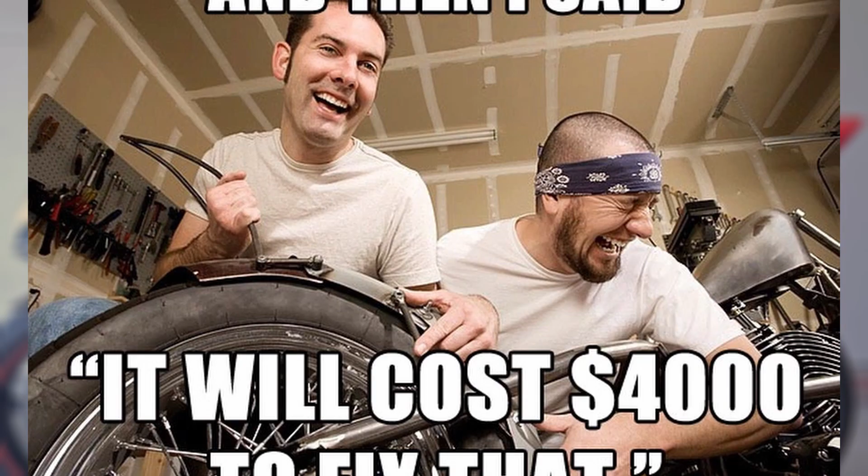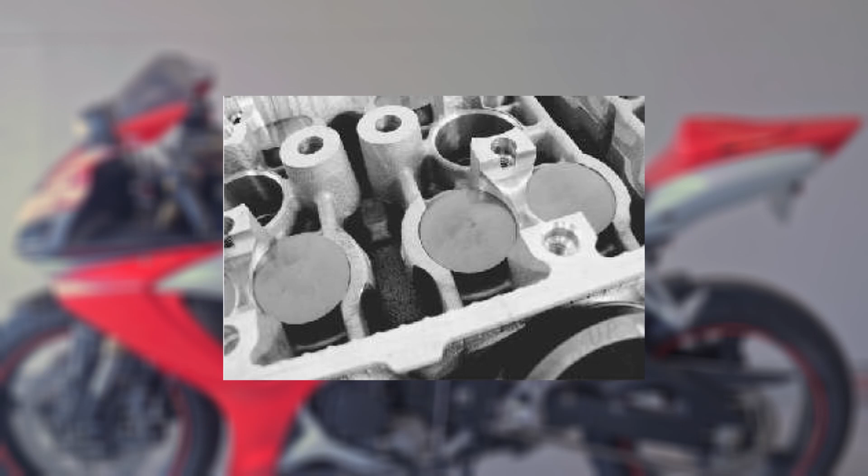So with that being said, hopefully you can learn how to do these maintenance cycles without having to take it to a dealership or mechanic. There are some honest mechanics out there, but as a whole you're just going to save a lot more money by doing these services yourselves. And they're really not that difficult, to be honest with you. I guess the most difficult one you will ever do is checking the valve clearance. That's really the hardest it's going to get, to be honest. But aside from that, like I said, pretty easy.

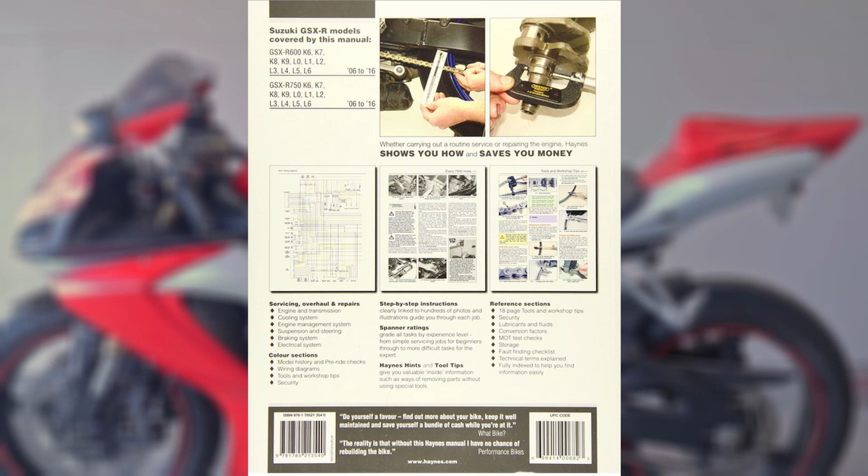If you haven't already, I would recommend you find the service manual for your motorcycle. Suzuki generally has one already, but if not, you can use third-party vendors. The Haynes service and repair manual is a good one. I have it myself, and if I'm ever stuck on anything, I always reference back to that manual. So if you're mechanically inclined and you can follow directions, you shouldn't have any issues following along. It's pretty clear, and like I said, if you're mechanically inclined, it's going to make sense to you, and you'll figure it out.

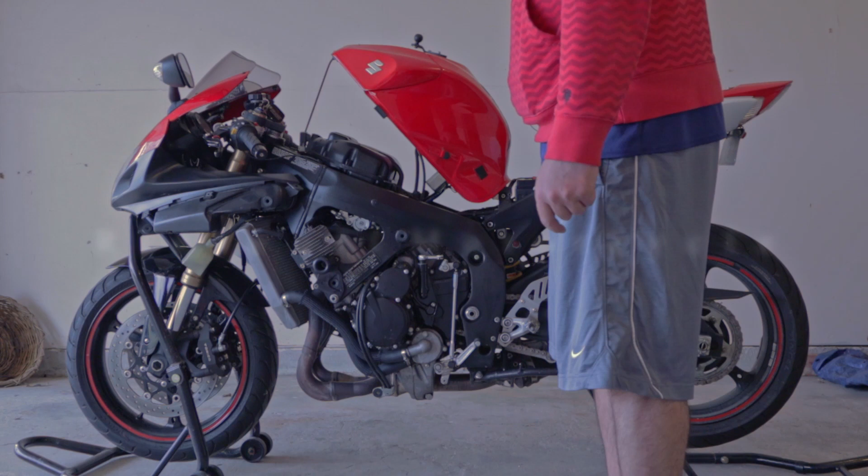So before you get started with the maintenance, it's always a good idea to rinse off your motorcycle, blow off any dust you might have in the engine area. That way you don't get any dirt inside the engine whenever you're either checking the spark plugs or opening it up. Also, you want to put your bike on stands. It's not necessary, but it makes it a whole lot easier when you do that. Of course, you want to take off your fairings, seat, and lift your tank, and get ready for the actual maintenance.

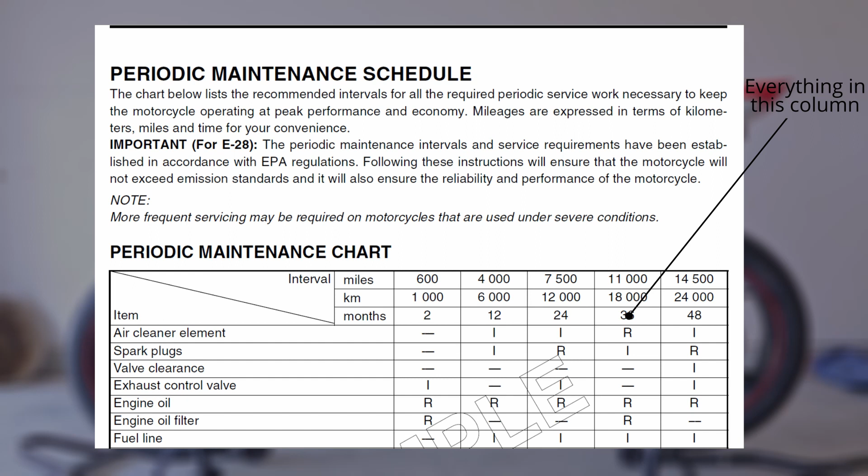So what I'm going to do is go straight off the service manual. I'm going to work down the list as recommended in the service manual for the 11,000 mile cycle. Keep in mind these are just suggestions by Suzuki. Depending on how hard you ride your motorcycle or your style of riding, these cycles might have to be shorter.

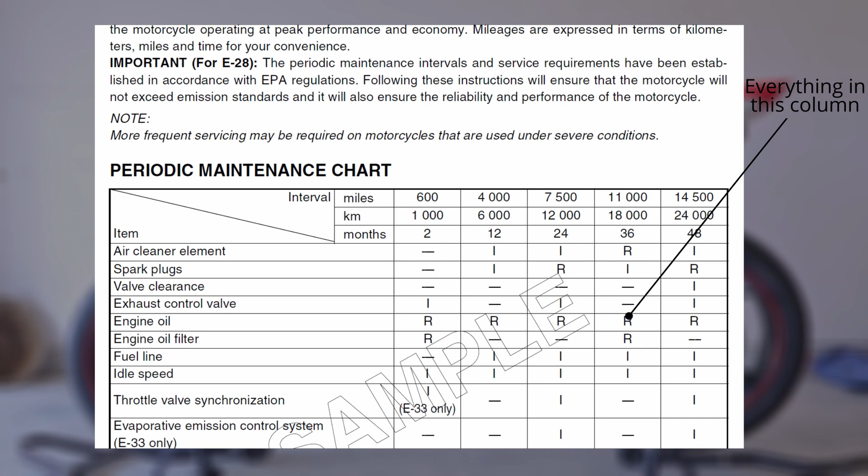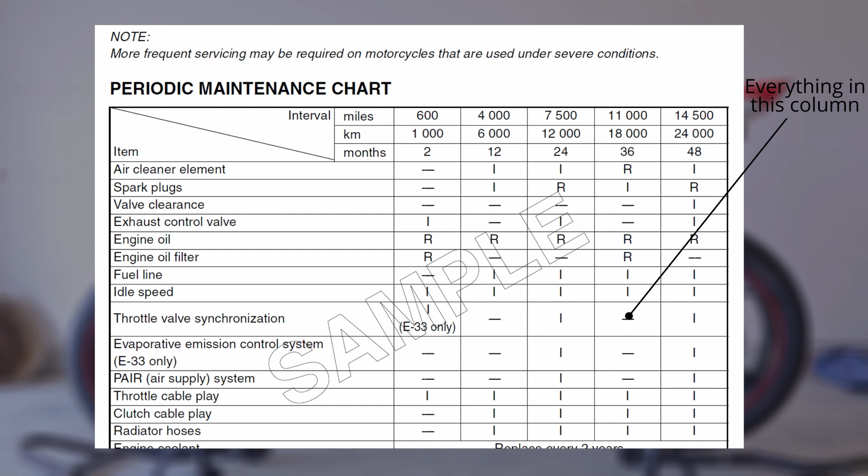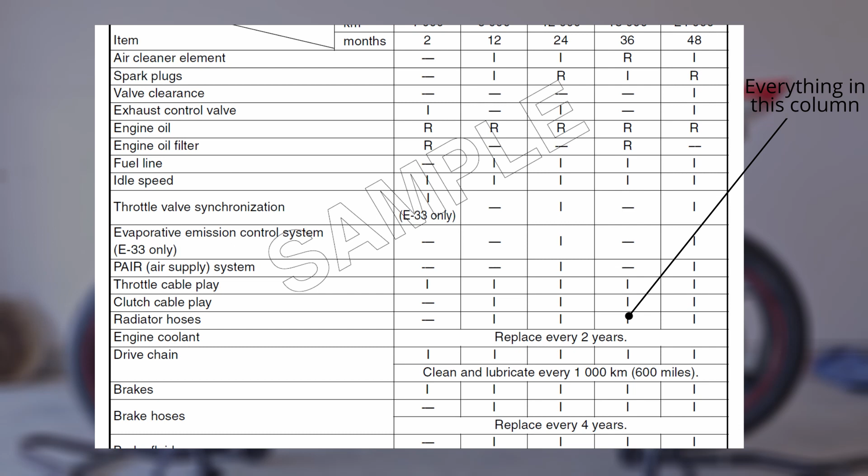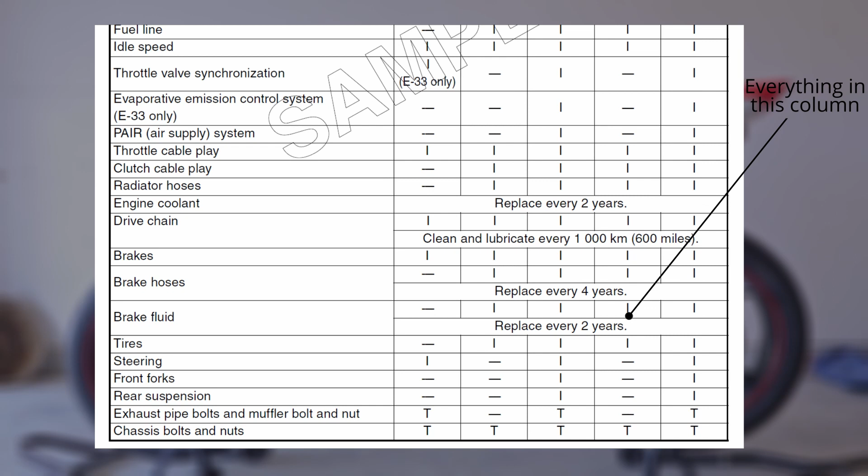Also keep in mind that this is a K7 GSXR 600. For the most part it's going to be the same for newer models, but there might be a few things that are missed. These bikes are, I guess, low tech, so you don't have all the new technology that the newer bikes have. So there might be some extra things you might have to take care of on the newer models. But as a general rule, these are the important things.

Alright, so the first thing we're going to do is replace the air filter. There are some screws that you're going to have to take off to take the top off, and just take the air filter out and replace it, using the original Suzuki OEM air filter. There's all kinds of air filters that you can install, but the engineers engineer these bikes for a particular airflow, so I'm just going to stick to the OEM air filter. You can get it for about 40 bucks. It's not that expensive, 40 or 50 bucks, I don't remember what I paid for it.

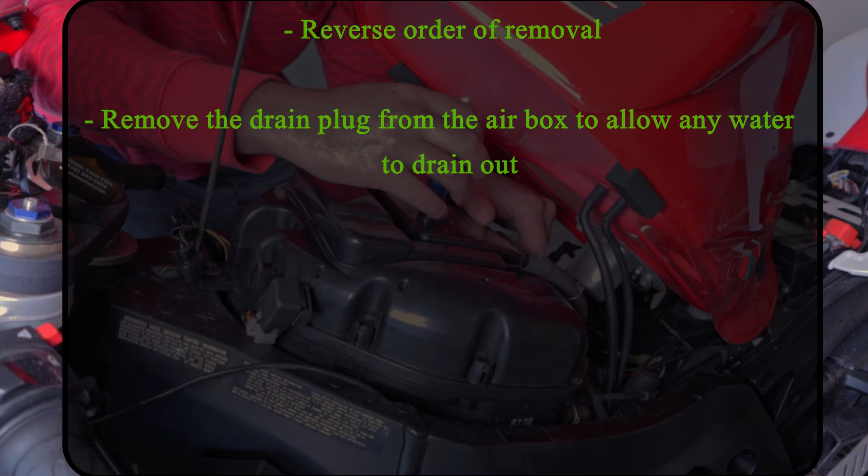There we go. So before I change the air filter, I'm just going to clean everything in there. Obviously you want to use a dry rag.

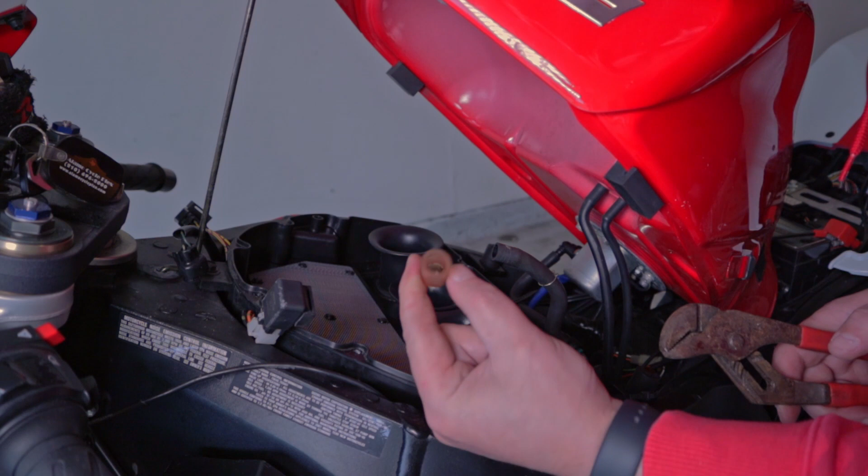One last thing is down here there's a plug, I don't know if you can see it. Sometimes water accumulates in there, so you want to make sure you drain it. This is the little cap I was talking about. Sometimes there's fluid in there, but as you can see, it's dry, which I think is a good thing. If there's no fluid, you can see bugs and stuff.

Alright, so once you do that, you just put the little ring back on there and you're good to go. Now it's just a matter of putting the screws back on.

As you can see, it was definitely time to replace this air filter. It's all dirty, there's all kinds of debris in between.

Okay, so now to check the spark plugs, we have to remove the actual air box. There's 4 butterfly valves, and at the base of each one is basically just a cylinder that goes up into the air box. At the base there's a clamp that tightens the air box onto those cylinders where the butterfly valves are housed. I don't know the proper name for those, but trust me.

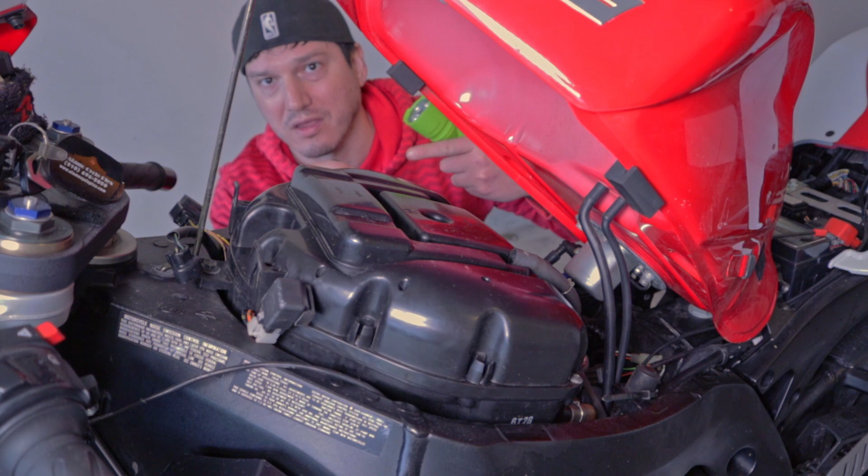It's a little tough to show you on camera. I would have to literally take the whole tank off to get a view this way, and I don't think it's necessary because it's not that complicated. All you're gonna need is a screwdriver, and once you do it before, it's gonna be pretty easy to do it again.

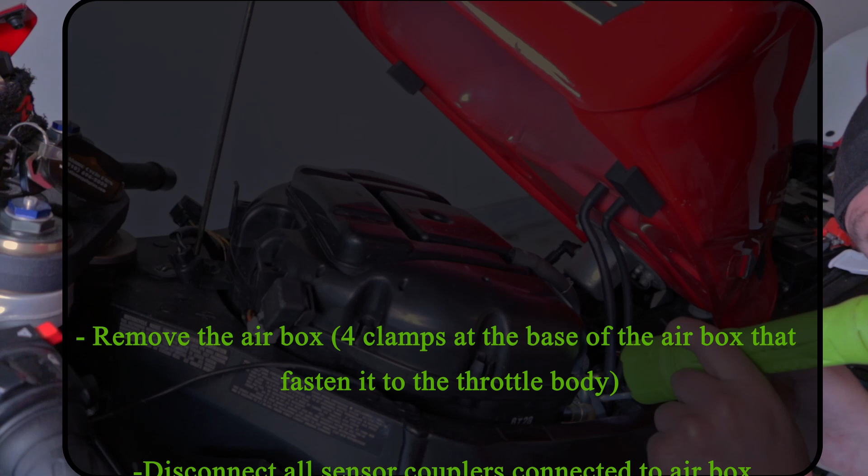I think they're loose enough, so hopefully that's enough. Oh man, I forgot — there's also a nut right here that I completely forgot about that you have to take off. I think it's 10 millimeters. Yeah, it's a 10 millimeter nut.

Alright, so now I think it should come off. As you can see, the whole air box comes off. Then you just reorganize everything here, all the wires and hoses that you took off.

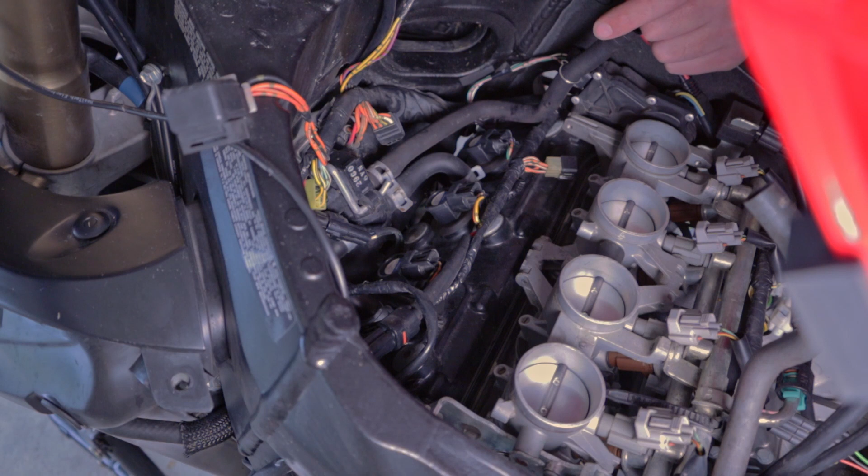Alright, so once you get the air box off, you're gonna want to locate the spark plugs. The spark plugs are on top of the head here, and there's 4 — 1, 2, 3, 4. You want to disconnect the coil, each coil has a connector.

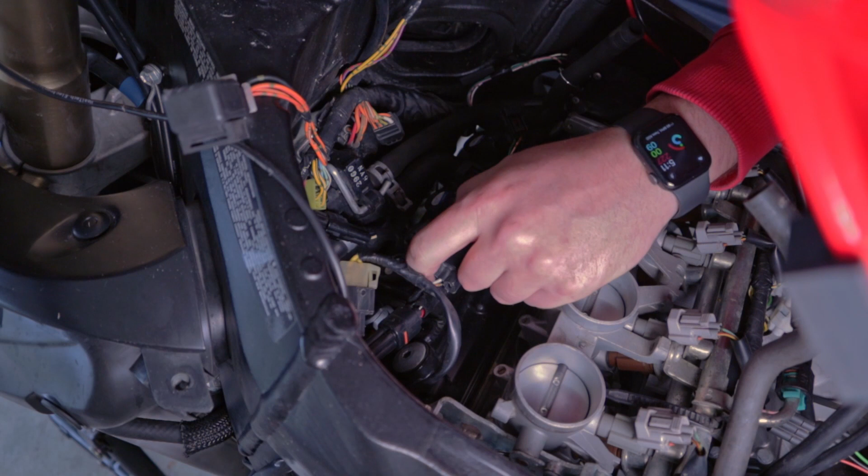You want to take those connectors off. It's gonna be hard for you to lose them because they kind of just go right there to each one. Once you do that, you just want to check each spark plug. It's hard, but you have to get each coil, kind of twist and pull up at the same time, and they'll pop off.

So these are the coils. This is where the electrical connection to the harness goes, and this is where the top of the spark plug goes. You kind of want to inspect it, make sure it doesn't look cracked or burnt or anything like that. Also check the connectors here, make sure they don't look bent. This one looks pretty good.

So now we have to take the spark plug out, and we need the tool for that. The tool I use came with the toolkit for the bike. I believe you can also use like a 5/8 socket, and all you do is put it in there.

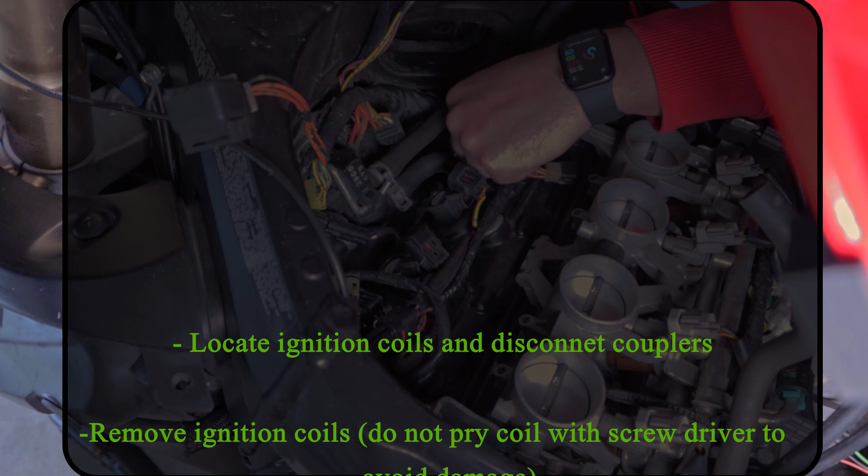You twist it till it locks. Socket there. So there we go, finally got it off.

So what you want to do is check the spark plug, make sure it's not wet, because if it's wet that means you need a hotter spark plug. And if it's like white, almost burnt looking, that means your spark plug is too hot and you need to go down. Of course you're gonna see some use in there, but this looks just fine.

The other thing you want to check is the distance between the electrode and this little flap here, and there are little tools you can use to check the length. It should be between 0.7 and 0.8 millimeters. You just slide it through — start at the very end, and then you just slide it, slide it, slide it.

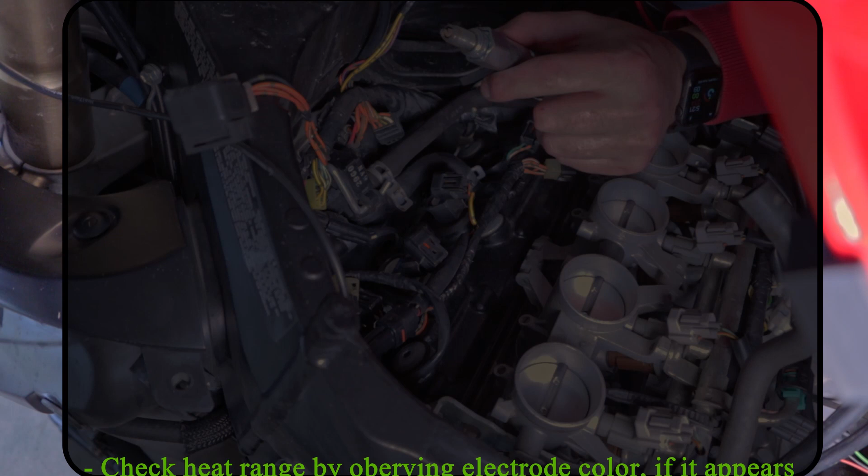All right, so this spark plug looks good, no need to change it. Of course, if I just changed it the last maintenance cycle, I wasn't expecting to have to replace it. But if it gets to the point where it's looking pretty bad, or there's a lot of carbon deposit, or it's really white or wet, that's a good indication that you might have the wrong spark plug in there, or it's not working as it should be. So once you're done, you just put it back in and you're good to go.

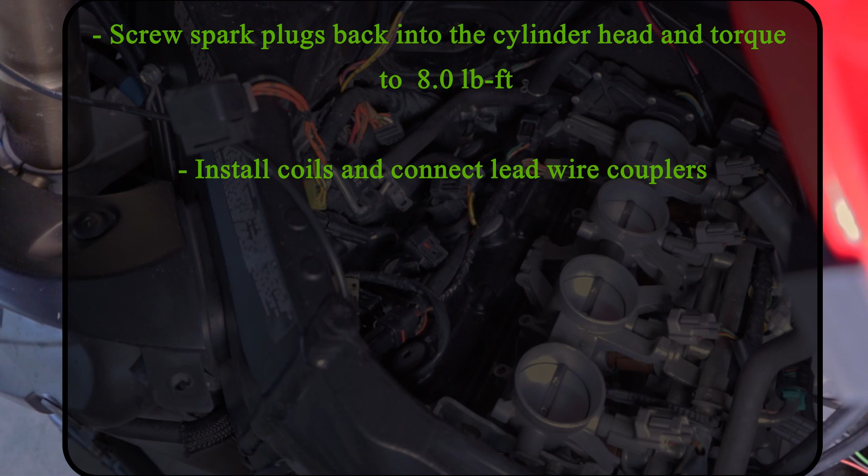All right, and once you do one, it's going to be the same thing for each one. The only thing I would say is once you put in the coil over here, you don't want to tap on the top. You just want to push it down till it clicks, and then reconnect the connector, and that's good. So you would do that for each one, and that's it for that.

While I have the airbox off, I'm going to check the throttle play because it's easier to see here. So let's do that now.

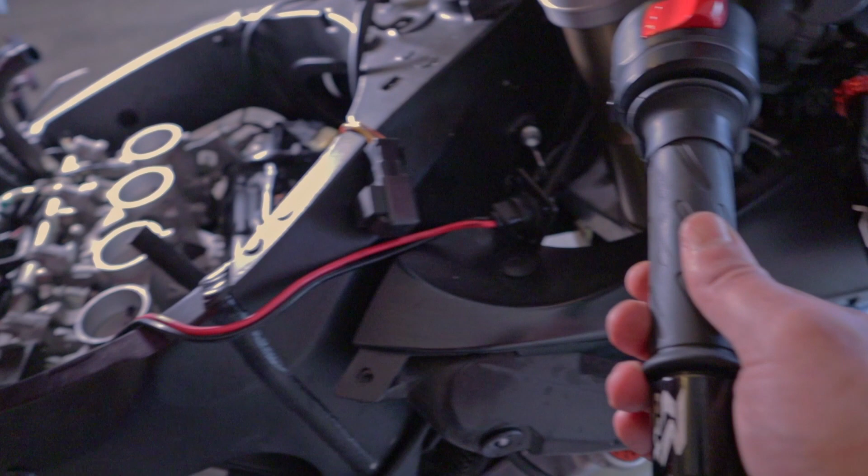So throttle play, you want to have almost no play, like a tenth of a rotation here, if that. So this is normal. If you had more play, like let's say that, okay, well right there, it's engaging the throttle - I don't know if you can see it move. But if you had this amount of play and the throttle still wasn't moving the valves, then that means you have too much play in your throttle, and you would just need to adjust the throttle play.

Let me show you where that's at. It's going to be on your left side of the bike. Left side of the bike, you see there? You see that circle turning? So there's an adjustment right here that you could make to tighten that up or loosen it up depending on what you need. And that's where you would make these adjustments right here to tighten up the throttle or loosen it up.

So before putting on the air box, check that. That way, if you do need to make adjustments, it's easy for you to do right there and make those adjustments. But other than that, if there's no adjustments that need to be made, you would just put the air box back in and move on to the next thing.

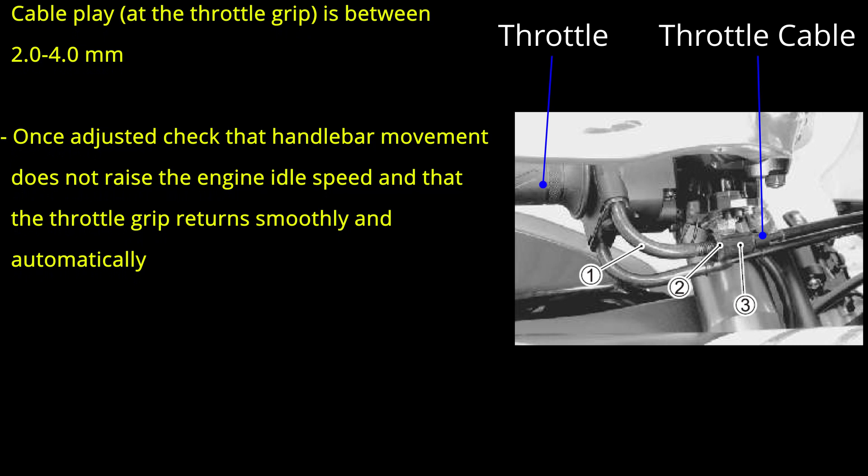The next thing we're going to do is change the engine oil and the oil filter. To drain the oil, you need to take this plug off here, and then the oil filter is there. So let's do that real quick.

Just a quick tip here before you get started: make sure that you warm up the engine pretty good, and that way it'll all flow out.

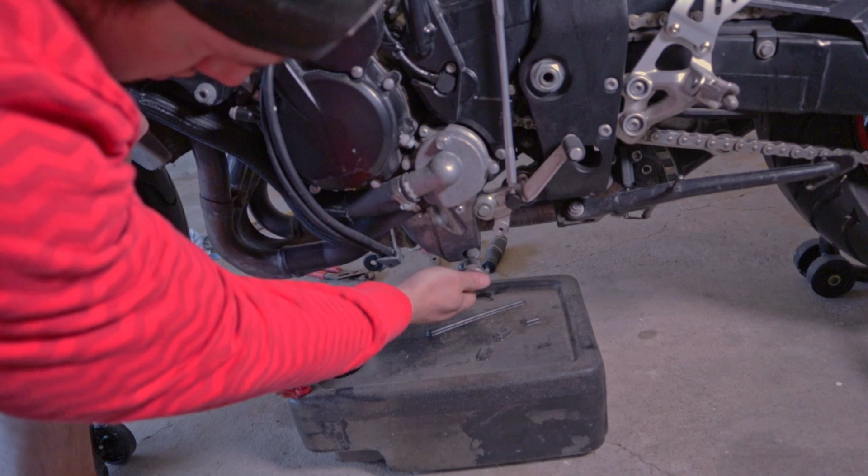Now first you just want to crack it a little bit, and just slowly let it pour out so you don't make a mess.

All right, once you see that most of the engine oil has drained out, the next thing you want to do is drain the oil filter. And the oil filter is located right in this area right here.

Same thing, you just want to slowly let it drip, that way you don't make a mess.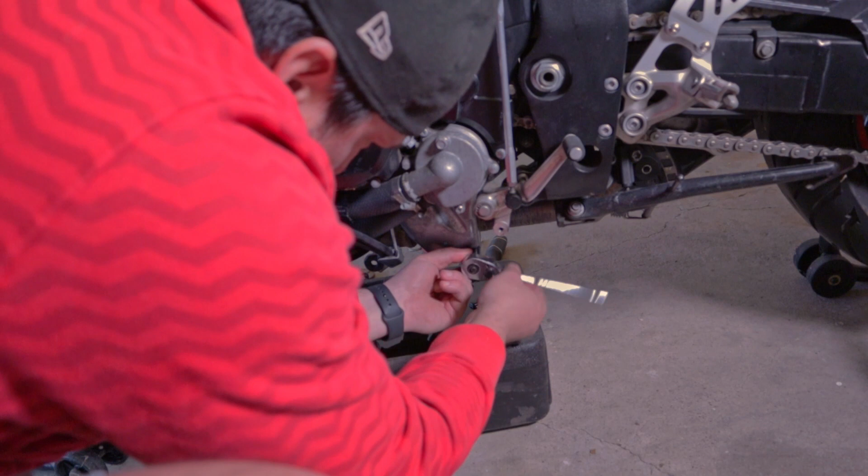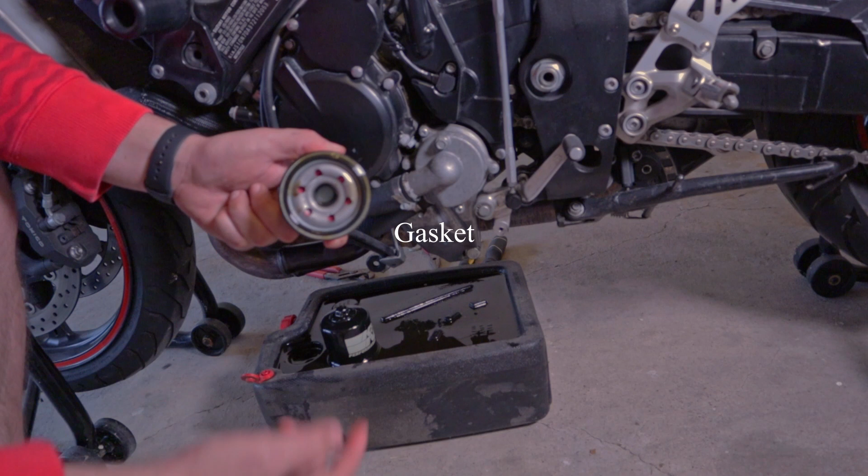All right, as far as the oil filter, I used the K&N - it's the KN 138. Make sure you put a little oil around the gasket here, rub it in, and then just put it back in.

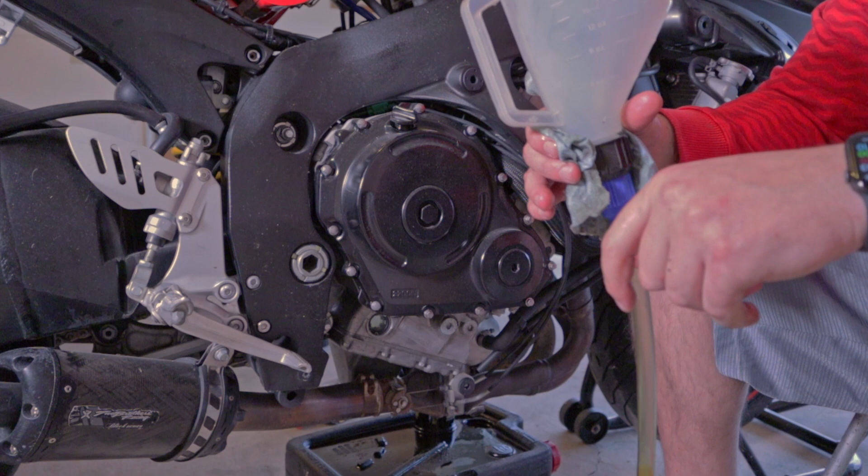So the next thing is to obviously fill it up with some oil. On the right side, there's a cap here - here's where you fill it up. It takes 2.7 quarts, I mean, not liters. And I like to use the Mobil 1 Racing 4T 10W40 oil. So I'll put 2 and a little bit, about 2.5, a little over 2.5. So I just put my tool up here.

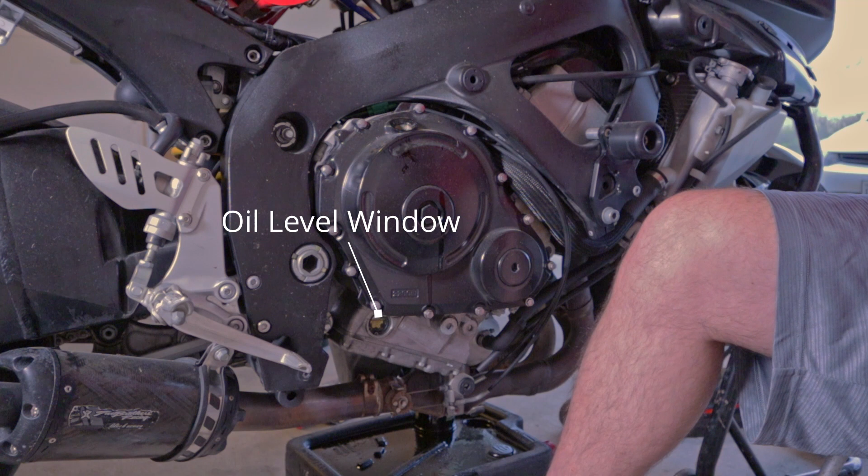Then you want to start your bike, let it run for a little bit, look for leaks, and recheck the level again over here. Make sure that it's where it needs to be.

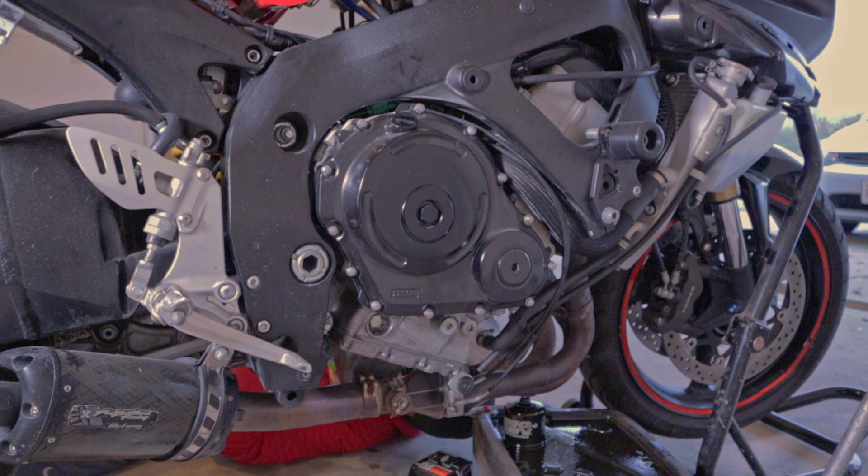So you want to let it run. Like I said, check for leaks, make sure there's no oil leaking. Then let it sit for a little bit and check the oil level again. If it needs to be filled to capacity, then you add a little bit more, and that would be it for the oil filter.

For the oil change and filter, the next thing on the maintenance is to inspect the fuel lines.

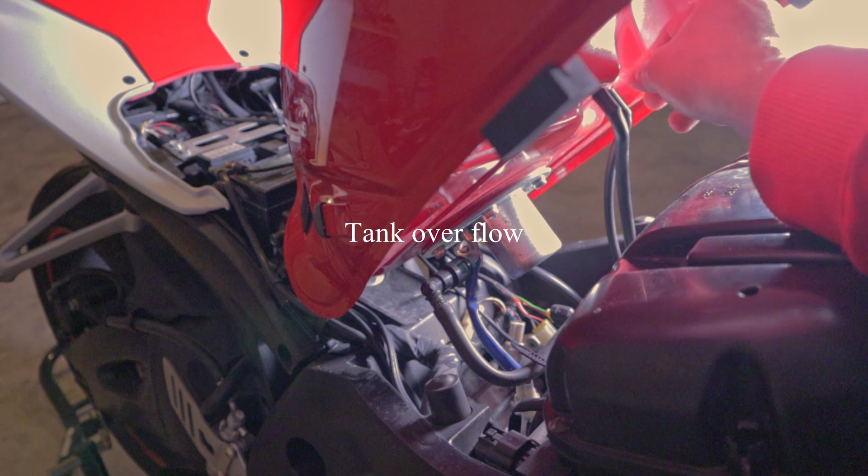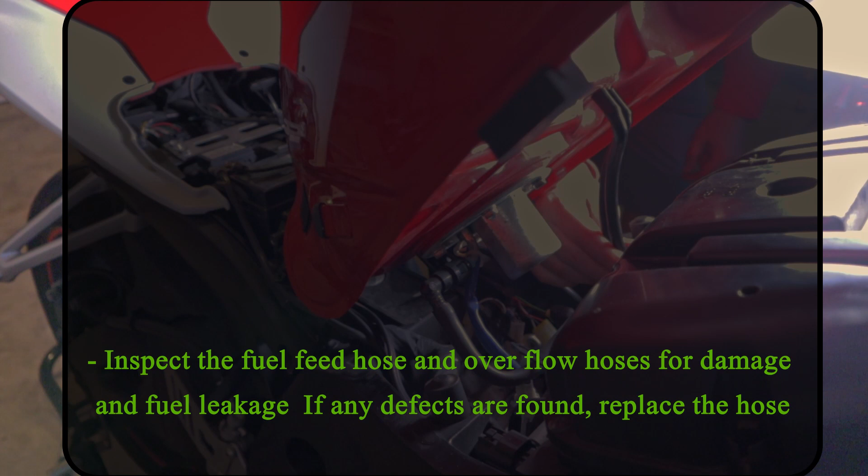This is pretty easy. Basically, you see these lines here. These are the reserve, the extra if you put too much in the tank. So basically, just inspect these lines here. They go all the way down to the bottom. You can actually pull them up if you like, but I don't recommend you do that. So basically just follow them all the way down.

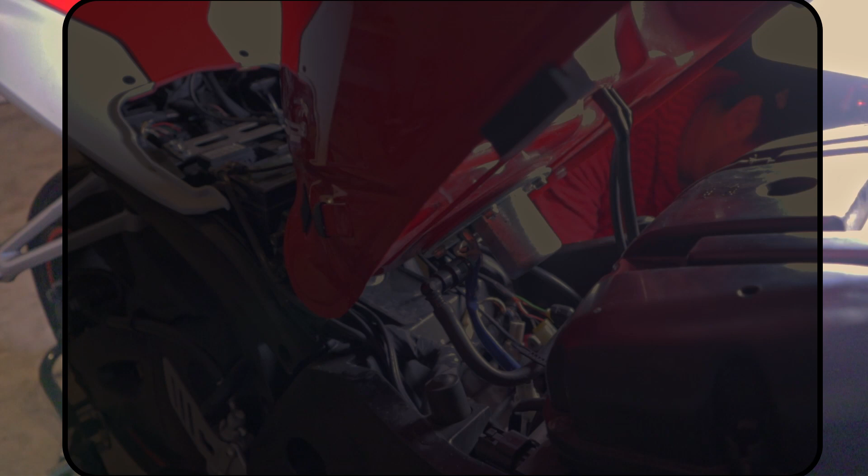And they come out to where you change the oil. So they go on the left side, all the way across and down. Just make sure there's no cracks on these lines. If these are damaged, not a huge deal, especially if it's damaged down here. If it's damaged up here, then yeah, you need to replace them, because that means there's going to be gas leaking on your engine, which could be a big issue.

But mine look fine. They don't look brittle. They're still kind of elastic, so not going to worry about it.

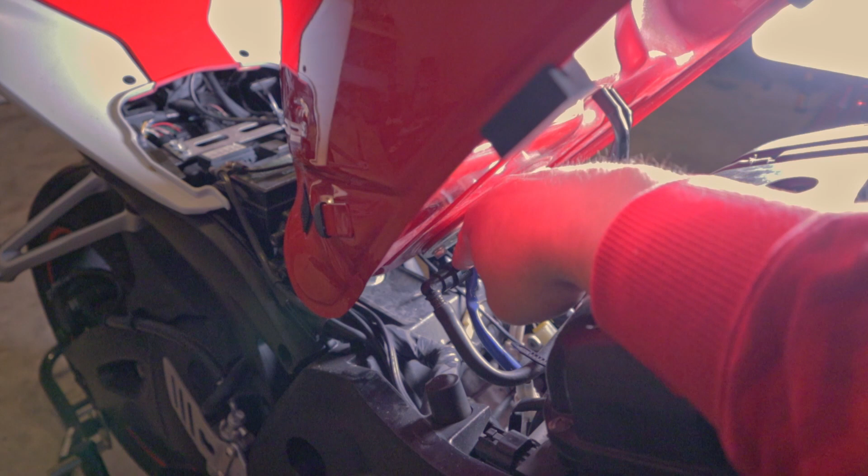Then the next thing you need to inspect for your fuel line is this line right here. This is the fuel pump, and this is the line that the fuel pump pumps into. Basically you just need to make sure that it's not brittle, it's not leaking, and just follow the line all the way up to here till it turns to aluminum. Make sure that there's no leaks, and if there were leaks, you would definitely smell gas. So yeah, just inspect those lines, make sure that there's no issue there.

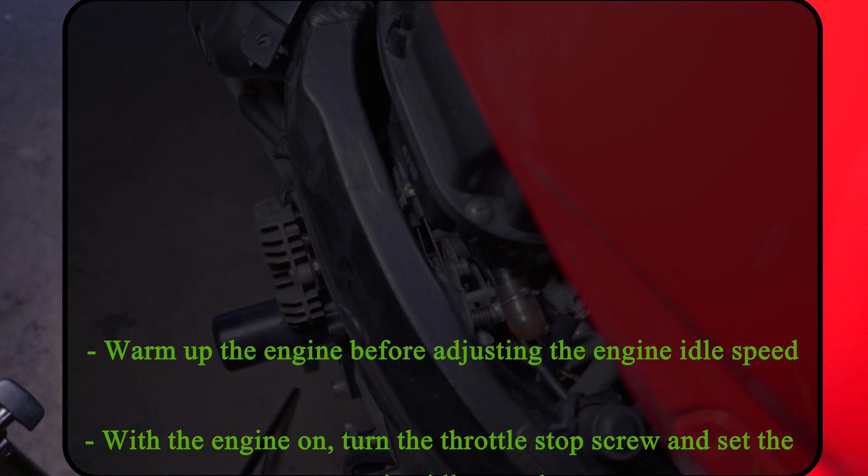All right, the next thing you need to inspect is your idle speed. So what this means is whenever your bike's idling, it should be at a certain RPM. The RPM should be around 1300 at idle, plus or minus 300. So if, let's say that your bike is at 800 RPMs or 2000 RPMs, obviously that's out of range.

So you would want to adjust your idle speed to make sure that you get it into that 1300 cushion. If you do have an issue and need to adjust it, on the left side of your bike there's going to be a nut, right there. That's the nut you would adjust. I believe lefty loosey, righty tighty. So if you go to the left, it should make your RPMs lower, and if you go to the right, it should make your RPMs higher. It's a little bit tricky to do, but it's manageable.

So yeah, this is where you would make that adjustment. Mine is fine, so I don't need to adjust it. It's just part of the maintenance to inspect it to make sure. And like I said, if you do need to make adjustments, this is the nut that you would adjust for the idle speed.

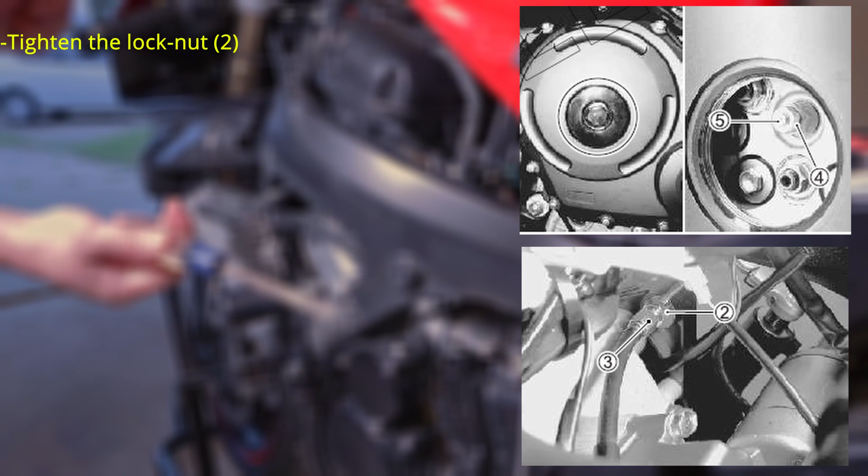So the next thing we would inspect would be the radiator hoses. There's going to be some hoses on the left side and on the right side. Here you want to inspect this hose right here that goes all the way through here and in there. Basically, you just want to make sure that it's not brittle and that there's no leaks. To get in here, you would need a flashlight to see in there, but you can see where it connects, and if there is a leak, you would definitely be able to see it.

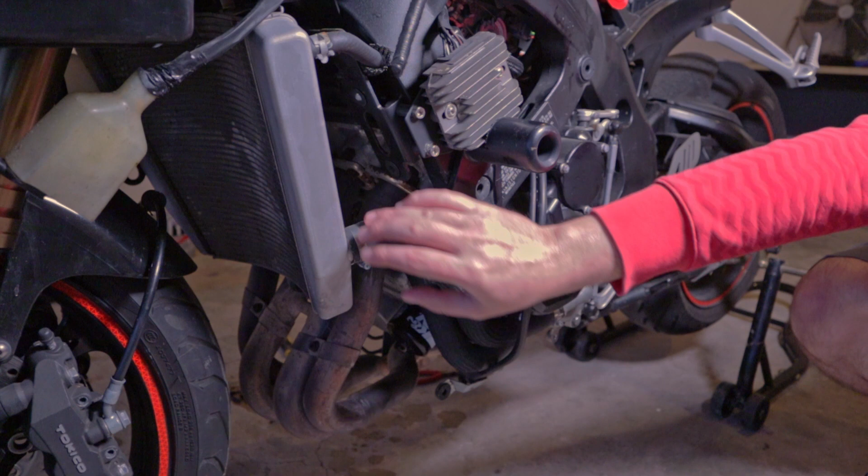The next hose would be here in the bottom. You would definitely want to make sure the connection's here. Same thing, make sure it's not brittle. And this connects over here to the water pump. Then there's another hose that goes on the lower end of the water pump. You definitely want to inspect this hose as well. This goes into the engine block right here. So you check it from here to there, and then from here to the radiator.

So those are the hoses you want to inspect. Once again, just make sure that they're not brittle and that they're not leaking. You would definitely be able to see if it was leaking. I guess the main thing is that they're not brittle. So let's check the right hand side. All right, so on the right hand side...

You want to check this hose here. Same thing, make sure it's not leaking, that it's not brittle, and it connects all the way to the back there. It's kind of hard to see, but once again, you would need a flashlight to see in there. So make sure that's not leaking.

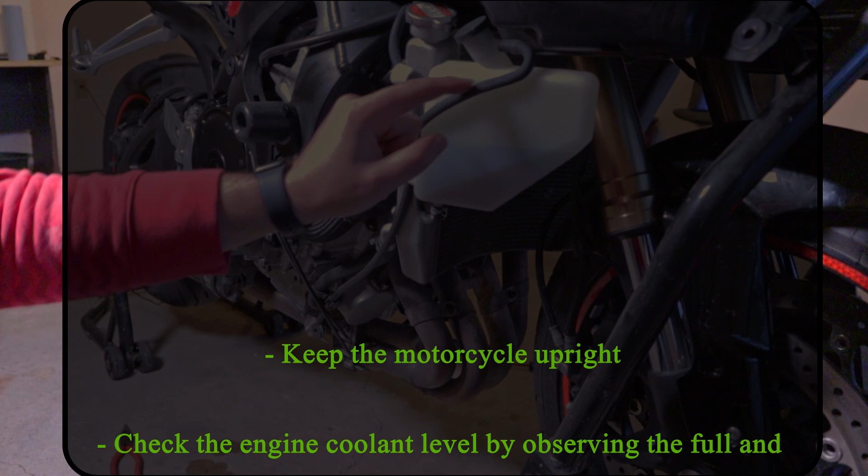Then you would also want to check this hose down here. Same thing, make sure it's not brittle. And then these hoses here, this is for your reservoir. From the top here, that goes in. So these hoses, once again, make sure they're not brittle or leaking. And then obviously you want to check your reservoir, make sure that there is some coolant in there.

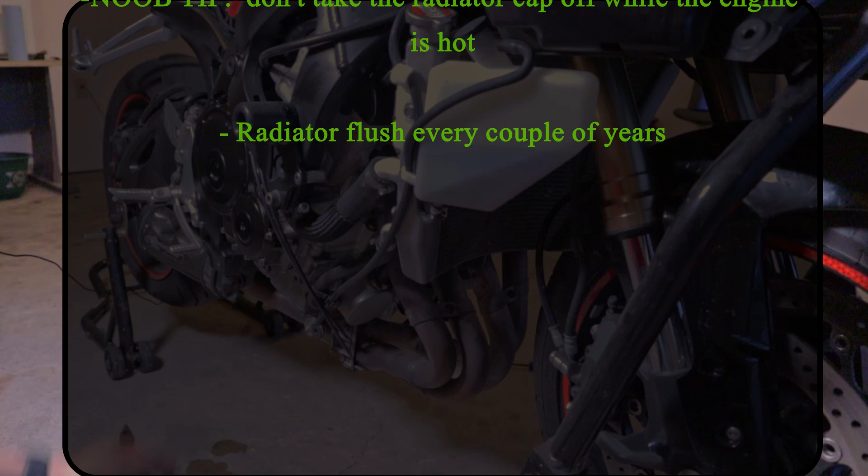You also want to make sure it's not cracked. Make sure that the lid's on there tight, same with the radiator. And the fluid you would only change every couple years.

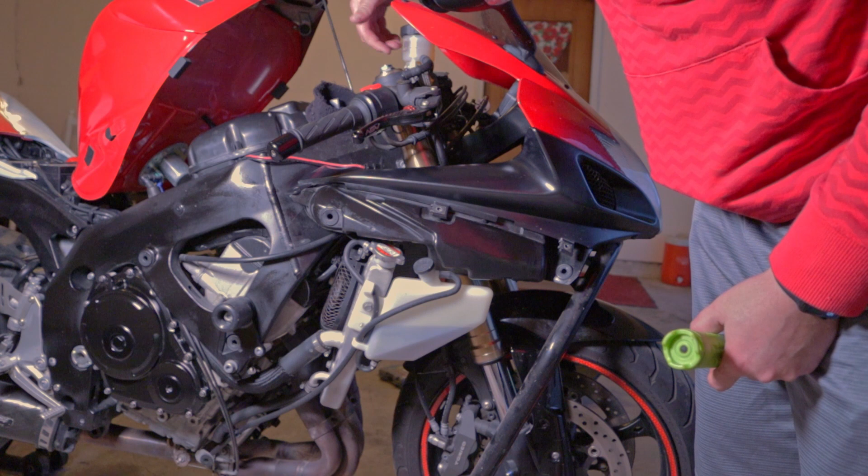Next thing you want to inspect is your brake reservoir. You want to make sure that the hoses are fine, that it's not leaking any fluid. You also want to make sure that your brake is nice and tight. There's going to be a little bit of play, but it should be tight. This is your master cylinder here. Make sure that there's no fluid leaking anywhere there. And then you want to follow the hoses.

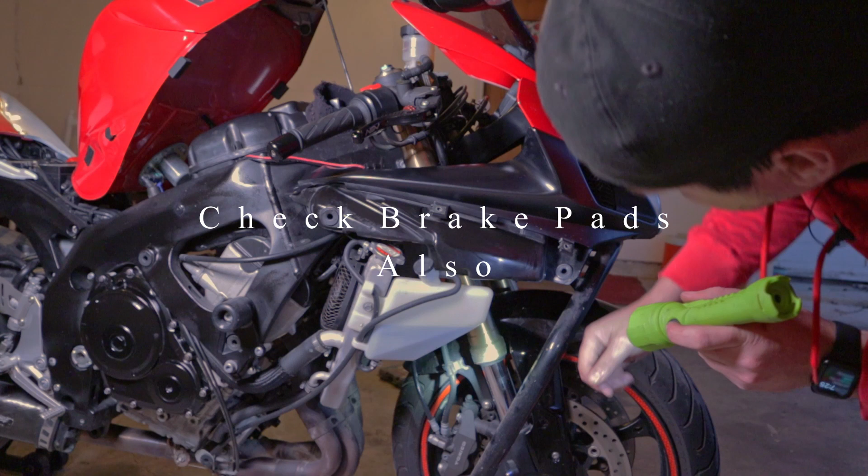Your brake hose all the way down, and then it breaks into two. There's a caliper on the right side, and then a caliper on the left side. So you want to follow each side. Make sure that there's no brake fluid leaking.

The brake lines are pretty tough, so they shouldn't be... not brittle, but you want to make sure that they're tight, they're hard. Because once they start going bad is when they start getting like a bulge or a bubble. That's when you know you need to replace your brake lines, because there's a lot of pressure in here, so these are going to be really hard. So there shouldn't be any play in these at all. Not brittle, but just hard.

Make sure that it's not leaking. Make sure that your caliper is not leaking fluid. And then you want to do the same thing on the other side. You would follow the brake line to this side here. Same thing, make sure that it's not bulging and that it's not leaking. You want to check your caliper as well. And that's good to go.

I recently had the recall for not recently, but 2 years ago, had the recall for the master cylinder, so they replaced the fluid. So I'm not going to replace the fluid till maybe next time around.

So on the rear, you want to check. This is the cylinder here for the brake. You want to make sure that it's not leaking anywhere around the cylinder. You want to check this line here. And on the caliper, make sure that there's no leaks as well.

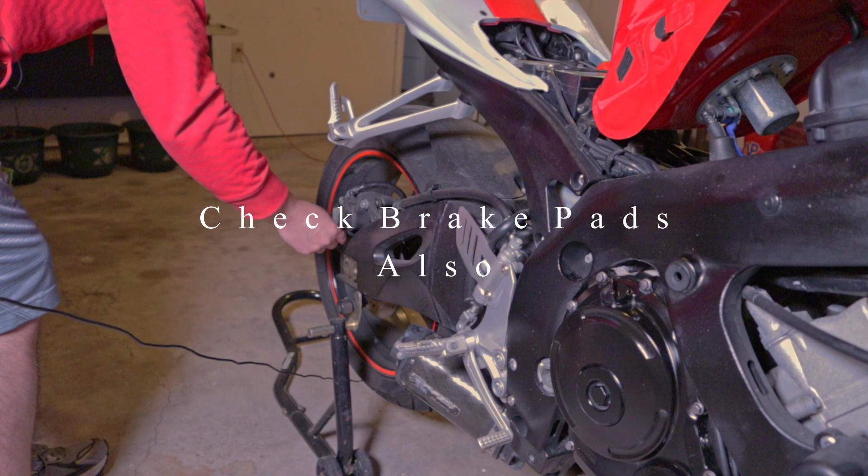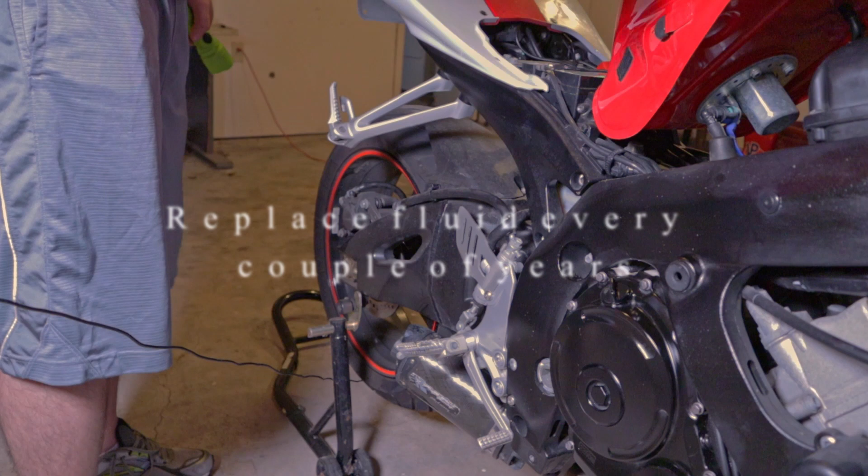Same thing on the line here, just basically make sure that it's not bulging anywhere and that it's not cracked or leaking. And the reservoir is up here. So this line up here is from the reservoir, and then from here it goes to the cylinder. But same thing, make sure that it's not leaking and that it's full. And it is here. Same thing, I'll replace the fluid when I do the front there. So that's what you would inspect.

All right, so the next item you would want to inspect is your tires. It's going to be the same for your front tire, so I'll just do my rear tire real quick.

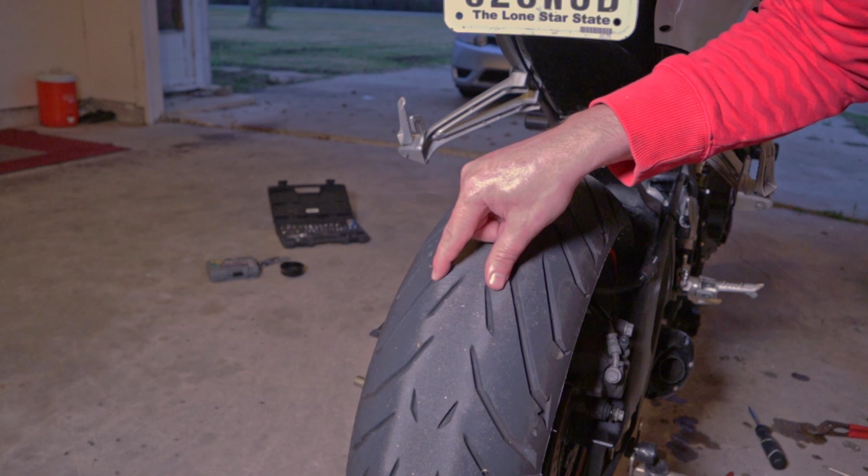Basically, you want to make sure that the tread is good and it's not used. There are some markers, I don't know if you can see it. Every tire has these markers. So once the tread gets down to level with the markers, that's when you know you need to replace your tire. I don't know if you can see.

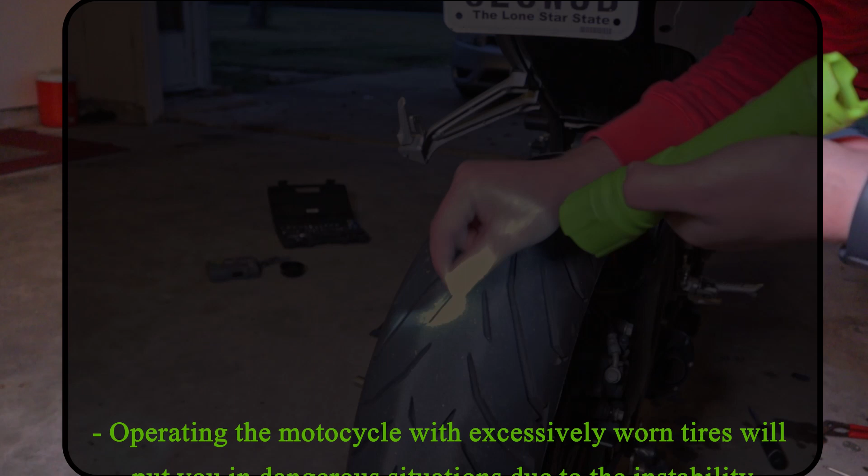Let me put some light on there. So right here, obviously I don't do a lot of cornering. I live in Texas, so there's nothing but straight roads here. So on the sidewall here, as you can see, I have plenty of tread. On the center, I still have plenty of tread, but as you can see, it's not quite as much as on the sides here. And that's it.

You also want to make sure there's no nails or any tears to your tire. Of course, you want to check the air pressure as well, and that's all you would do for the tires. Same thing for the front tire.

Next, the final thing you would do is your chain. You want to degrease your chain, and then you want to lube it.

First, you would want to scrape off all the dust. You're gonna need a brush. Then you can get any old kind of chain degreaser. Just make sure that it's for chain and sprockets, and that it's O-ring safe. And as long as it's O-ring safe, you're good to go.

And then you can get any chain lube, anything really works. All right, so the first thing you want to do is slowly just spray the chain.

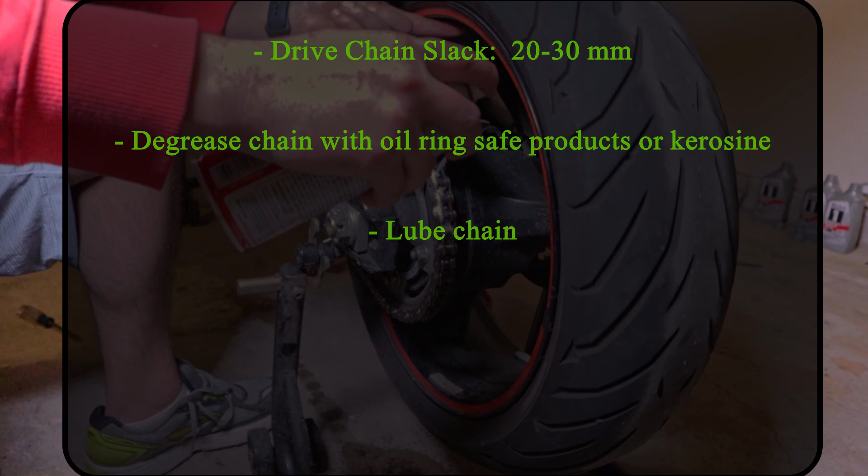Alright, so now that you've cleaned it off as best you can, you just use some lube. And that's all I do for my chain.

Another part of the maintenance cycle for the 600 mile maintenance is to torque your bolts. This isn't something that I did on the video. Not only did I forget, I didn't think it was necessary to show you guys how to torque bolts, but I do think it's important, because you don't want to be riding down the road with bolts coming out of your bike. So here's a chart that has all the bolts that need to be torqued, and they're all numbered. On the right hand side it has the proper torque, whether you use newtons, kilograms, or foot-pounds of torque - they're all there, so you can use whatever you use the most, or whatever your torque wrench has.

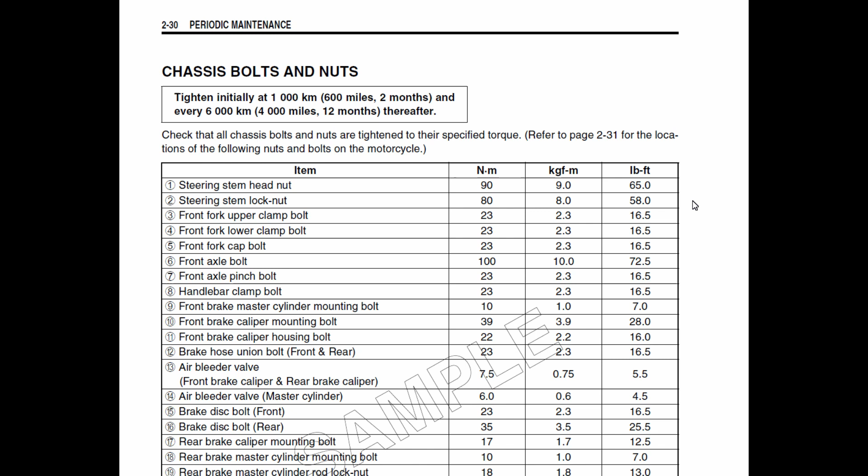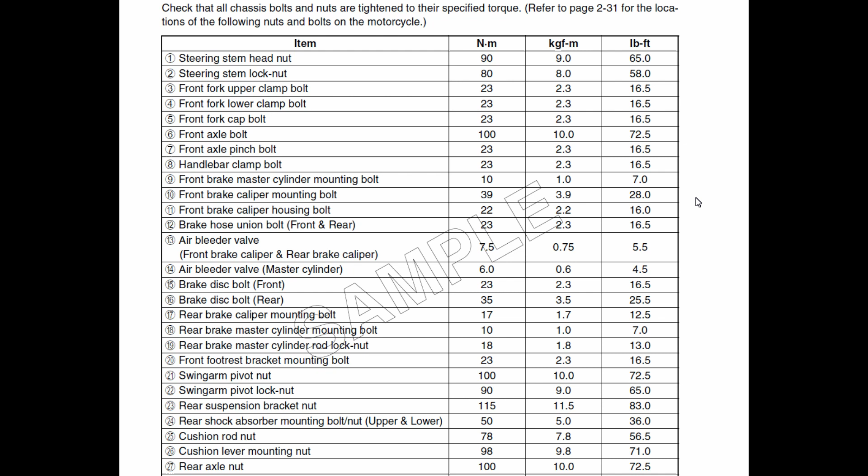So once again, on the item column, you have all the bolts or nuts that need to be torqued. They're all numbered, and on the right hand side you have the proper amount of torque they need. The reason they are numbered is because I'm going to show you some illustrations that pinpoint where on the bike they are, so you can easily reference the bolt or the nut and torque it to its proper torque.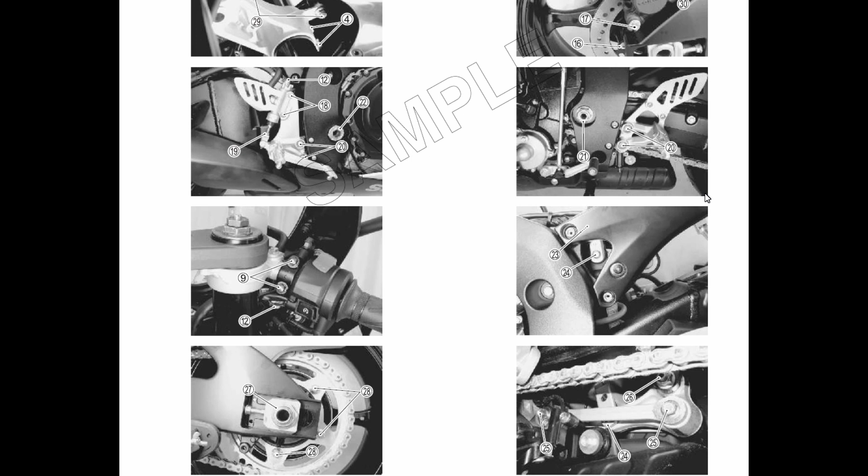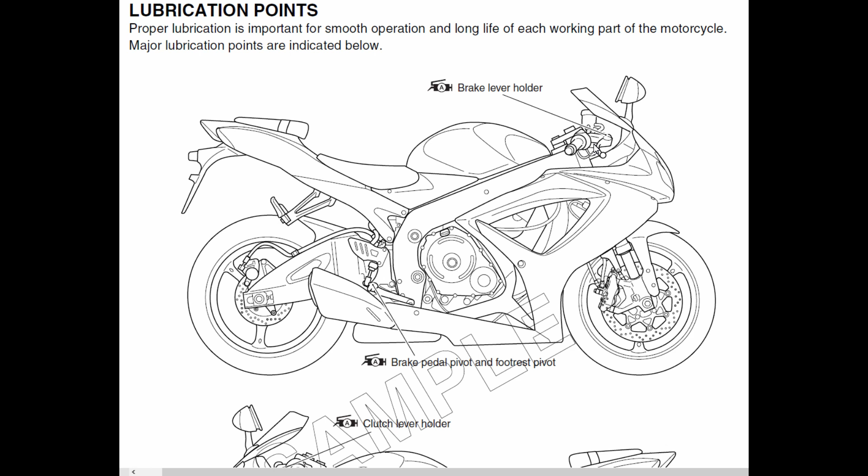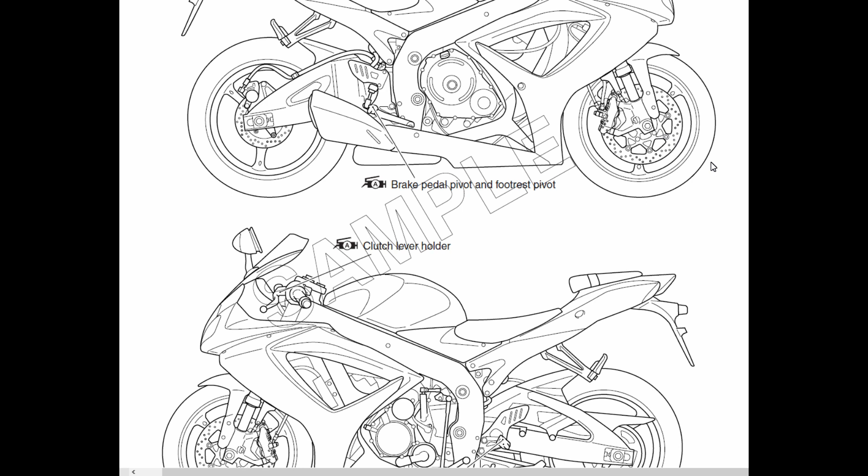Another thing you should probably do on every maintenance cycle is lubricate pivot points on your motorcycle. Of course, we lubricated the chain, but there are other pivot points too: the brake lever holder, the brake pedal pivot and footrest pivot on the right hand side for your brake, the clutch lever holder, the footrest pivot and the gear shift lever point - that's two different points - and your side stand pivot point, and of course, your chain.

Guys, that was it for the 1100 mile maintenance cycle. Of course, the last thing you would do is put all your fairings back on and put everything back into its original configuration, and that's it. You're done after that.